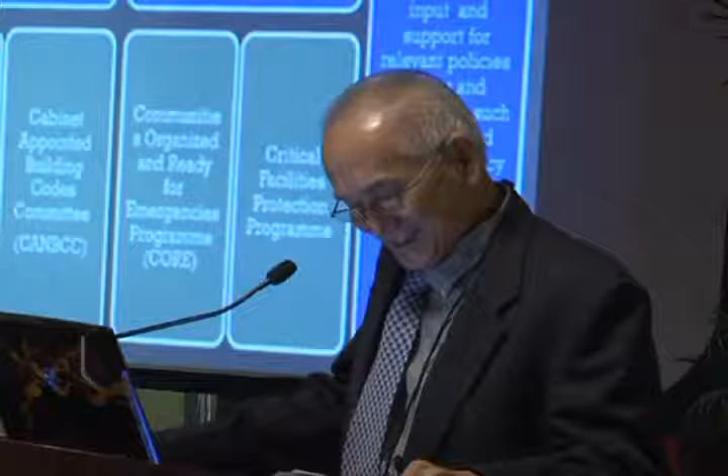For those of you who are familiar, I understand there's a very good agricultural faculty. In fact, my brother-in-law's son went to the University of Florida to do a degree in agriculture, and he's now assisting his dad in, some of you would know, La Vega Estate. Anyway, that's a plug for him.

Chris is a registered professional engineer in the state of Florida and the author of a paper on large wind missile impact performance of public and commercial building assemblies. Chris has worked on segmental and post-tensioning projects in the United States, Israel, and currently here in Trinidad and Tobago. His experience also includes the design and detailing activities relating to pre-stressed concrete, steel box girder and plate girders, and temporary works such as sheet piling, strongbacks, incremental launching, and false work systems.

He has worked on more than a dozen segmental projects, including the Frederick Douglass Bridge, Bonner Bridge, and Kanawha River Bridge, the longest span concrete box girder bridge in the United States. So Chris brings to us a wealth of experience in the field of bridge engineering, and he will now present to you his paper, Seismic Modeling of Multi-Span Semi-Integral Bridge. I invite Chris to the podium.

Thank you. I'd like to start by thanking APETT for inviting me. It's been very interesting and beneficial to be able to come down here and see some of the perspectives of other disciplines and the Caribbean in general, as you know, things are slightly different than they are in the U.S. But more importantly, it's been a really long time since I've had doubles, and so I've had the opportunity to get some of those on this trip.

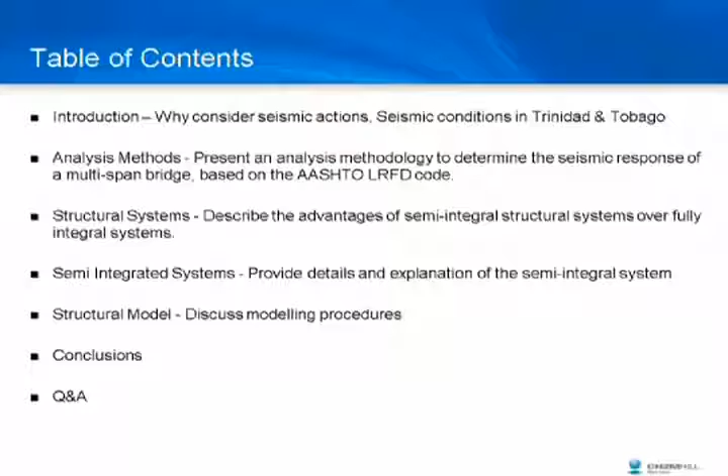So today I'd like to do an introduction on why we need to consider seismic action and what it can do to structures, and also go over some analysis methods, structural systems, and focus in on semi-integral systems and what their advantages are. And I'd like to finish up with some of the structural modeling to determine the seismic loads on a bridge.

Structural design in an active seismic zone can require careful consideration of a lot of parameters. A design engineer needs to consider things like seismic return period, which is a measure of an earthquake's severity—longer return periods equate to larger earthquakes. What the accelerations on the structure will be, how these structural materials respond—concrete obviously works a little bit different than steel—and how the different structural members behave. An I-section will behave differently than a 1.2 meter drilled shaft concrete section, and how the structure interacts with the soil surrounding it.

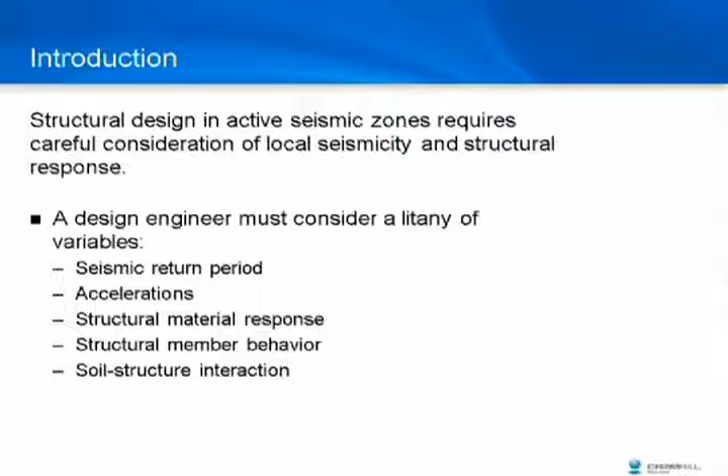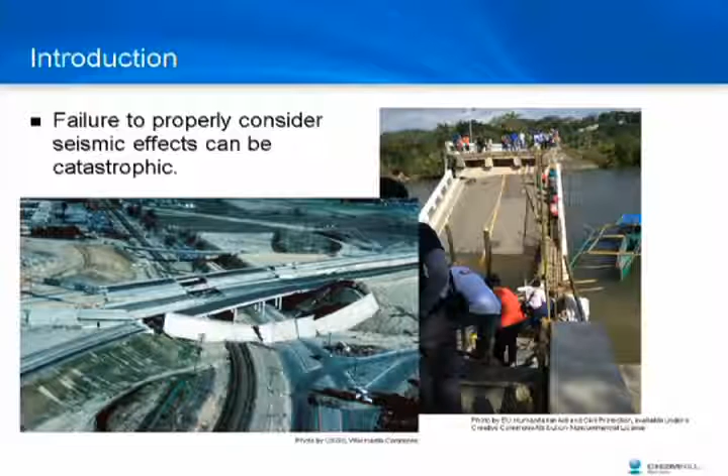Failure to properly consider these effects can be disastrous. They can cut off links between rural communities, also large interstates in the United States. There could be significant loss of life in a structural failure. This was seen in some of the earthquakes a few years ago in Northridge and the Loma Prieta earthquake.

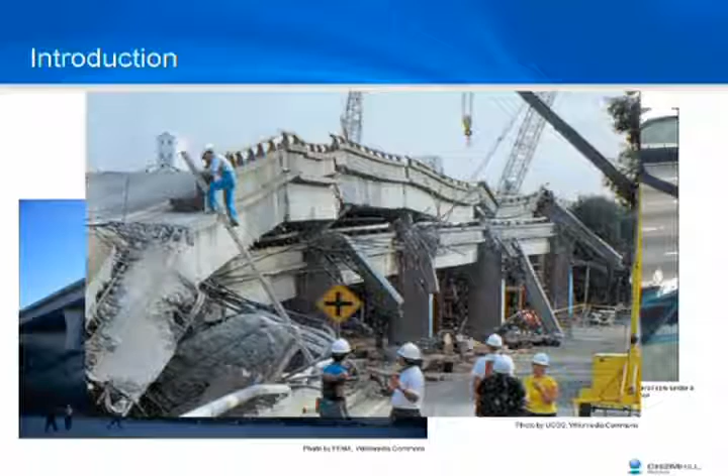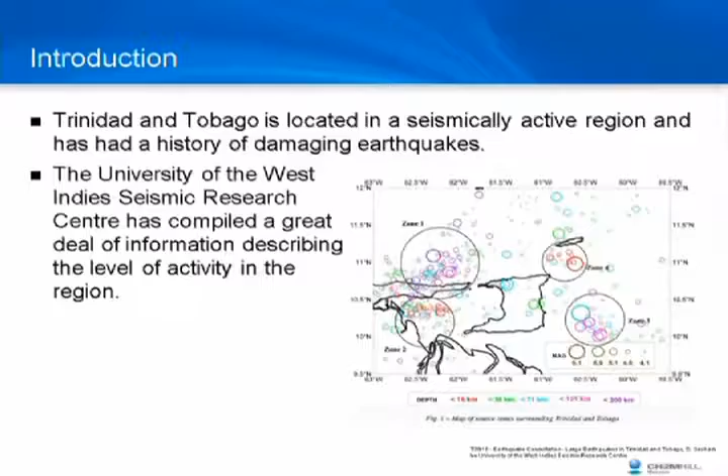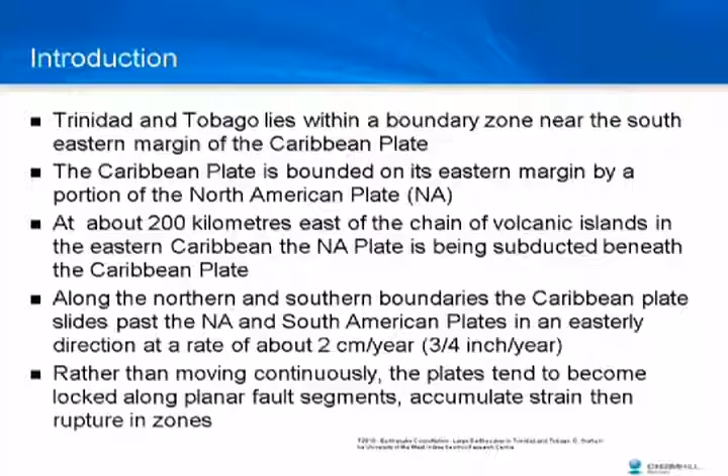Trinidad is located in a boundary zone between the Caribbean and South American plates. They move by approximately 2 centimeters a year relative to one another, and for us Americans in the room, that's about 3/4 of an inch. And rather than moving continuously as a smooth surface against smooth surface, they tend to lock, and then the restrained force is released all at once, causing an earthquake.

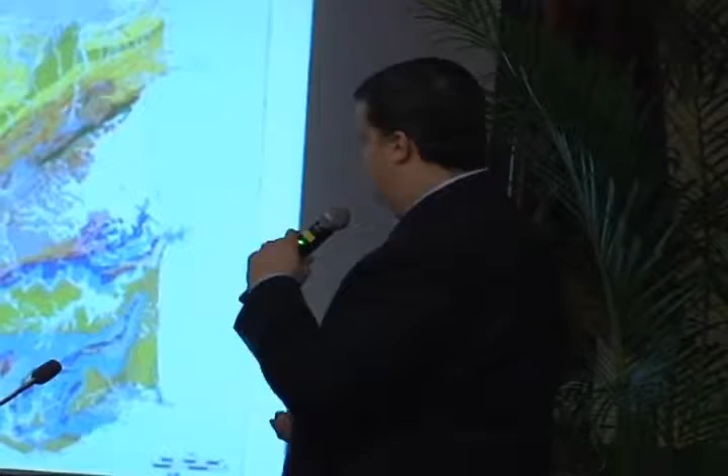Here you can see this is a soils map of Trinidad, and down here in the south of the island, there's a very clear delineation along one of the fault lines, where the soils to the west match up nicely with the soils to the east, showing some of the relative movement between the two plates. For reference, this is the Sir Solomon Hochoy Highway extension project currently under construction.

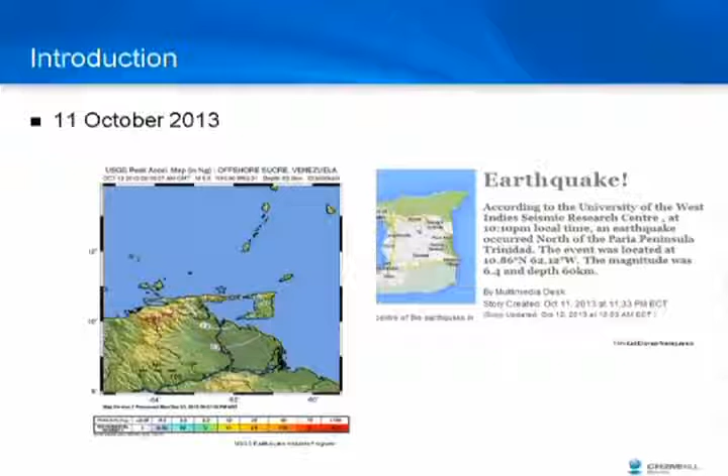Some of you may remember last year there was an earthquake to the north of Venezuela that was reportedly felt on the island. That's not too far from Trinidad. Had it been closer, you may have suffered more damage than was actually experienced. So now I'd like to talk about some analysis methods.

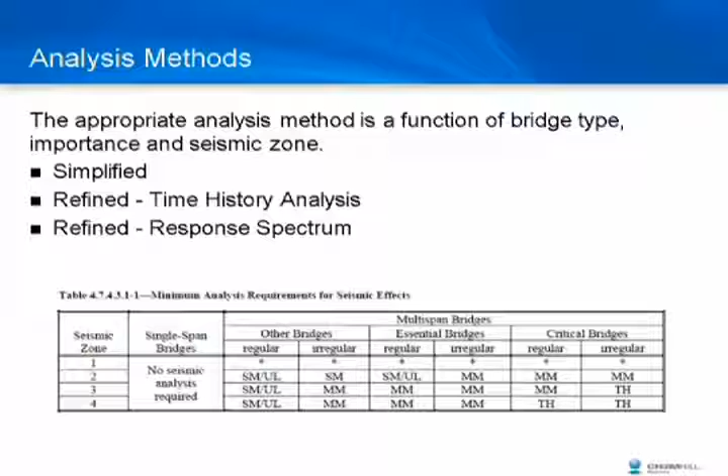The American Association of State Highway Transportation Officials has the design specifications used in the United States. They have various analysis methods that can be used, and they prescribe which can be used when, based on the importance of a bridge, a parameter defined by the owner; the regularity of the bridge, a measure of the relative span lengths, skew, curvature, and so on; and the seismic zone, which measures the risk of a seismic event for a particular structure. Generally down in Trinidad, we're in seismic zones 3 and 4.

These are the various analysis parameters that you're allowed to use. So for a relatively simple bridge in a seismic zone 2, you can use a single mode or uniform load method. As you get into critical bridges in higher seismic zones, it requires a more thorough time history analysis.

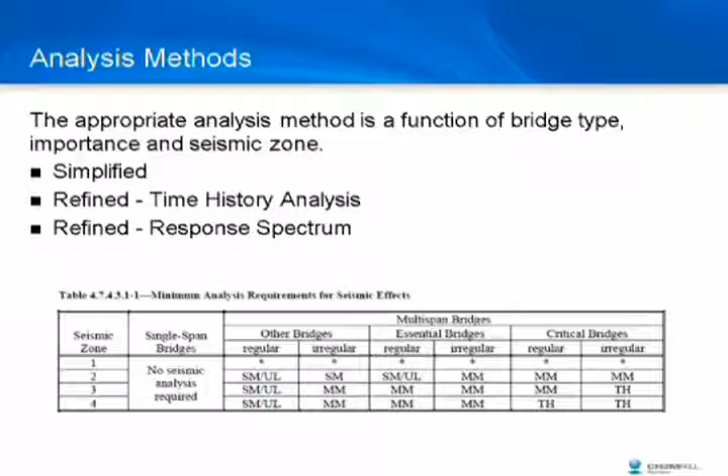There are simplified methods for a single span bridge. All you need to design is the connection force between the superstructure and the substructure. This can essentially be a force equals mass times acceleration calculation. For semi-integral bridges, which is what I'll be talking about today, this can be used to size the back wall, which is what will actually be taking the seismic force.

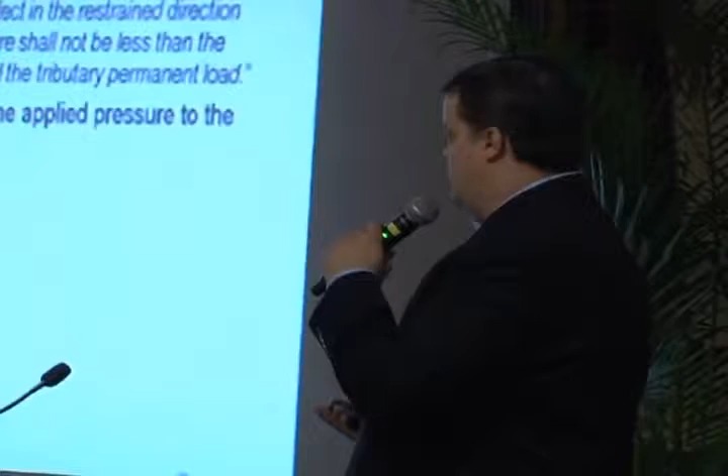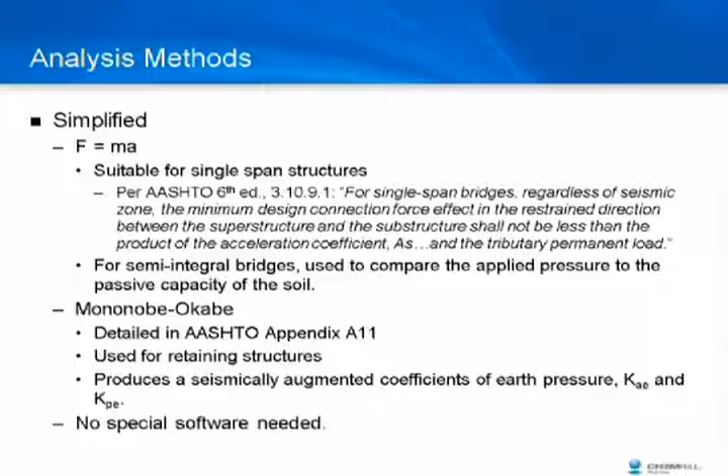Another related method is the Mononobe-Okabe method. This is a seismically altered coefficient of active earth pressure generally used for retaining structures, but it's a static analysis used to approximate a dynamic effect. There's no special software needed for these analyses.

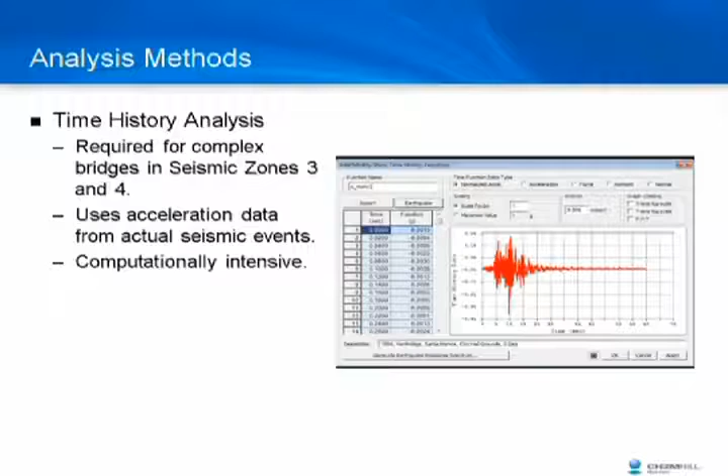The most onerous is the time history analysis. It's required for the most complex, largest, most expensive bridges. It uses seismic acceleration data from actual earthquake events in the United States, generally the Loma Prieta earthquake or the Northridge earthquake in California. These are computationally very expensive. Even the most state-of-the-art, high-powered machines can take hours or days to run through an analysis, depending on the bridge complexity.

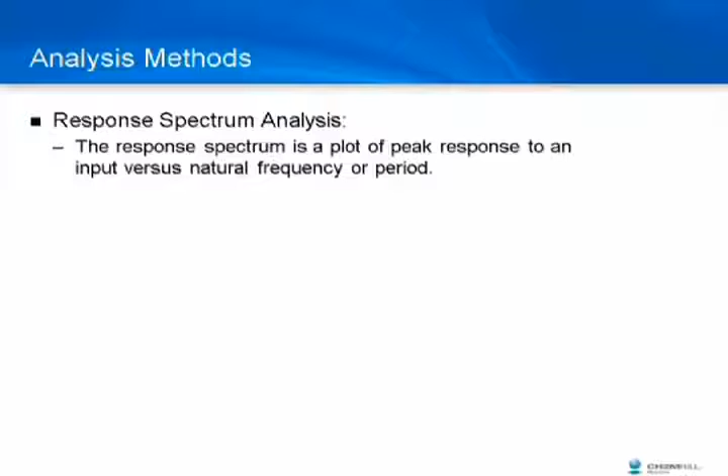In general, a response spectrum analysis is used. This is a plot of peak response versus frequency or period, and it allows a design engineer to consider multiple events and frequencies within a single analysis. It can be used for a single mode or multi-mode response, and for structures requiring a multimodal analysis, AASHTO requires that a three-dimensional model be constructed, with the number of modes considered being at least 3 times the number of spans.

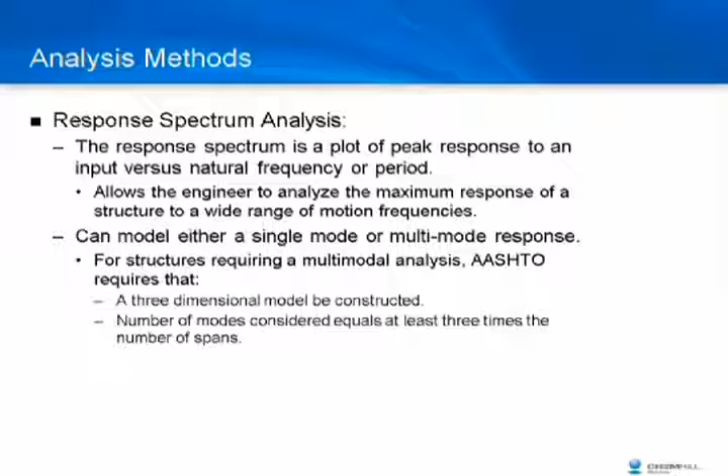So for the 3-span bridge that I will go through in a bit, that's 9 modes of behavior.

I've mentioned structural modes a few times. That relates to the structural behavior at various natural frequencies. So in this animation, for the first mode, at a natural frequency of about 1.7 hertz, it moves in one way. For mode 2, it is a completely different motion. And for modes 3 and 4, they are again different motions. So the same structure, based on different vibration frequencies, can behave differently.

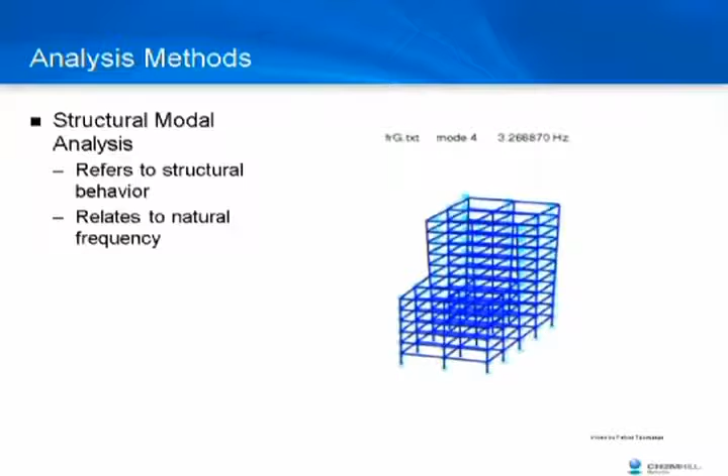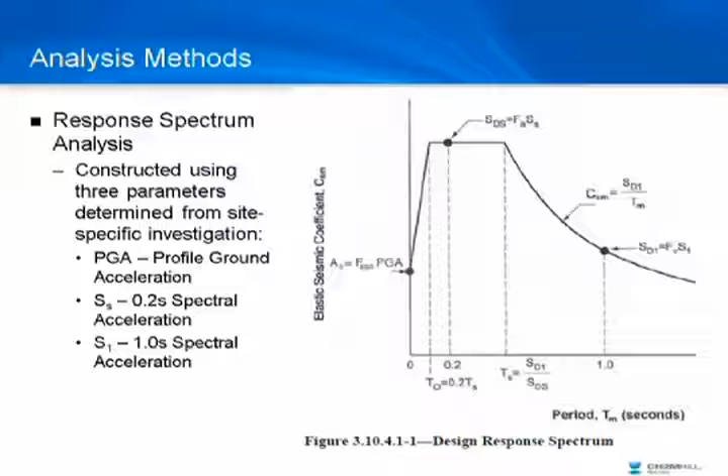The response spectrum is constructed using 3 seismic parameters: the peak ground acceleration and the 0.2 and 1 second spectral accelerations. This is the curve that is used to relate the acceleration with the period.

There are a couple of different structural systems that can be used in a seismic zone for a short to medium span bridge: the first being an integral structure, and the second being semi-integral. An integral superstructure is connected to the substructure. Here we have a diaphragm at the end of the beams, tied into the abutment cap with reinforcing, creating a rigid connection between the girders and the abutment wall.

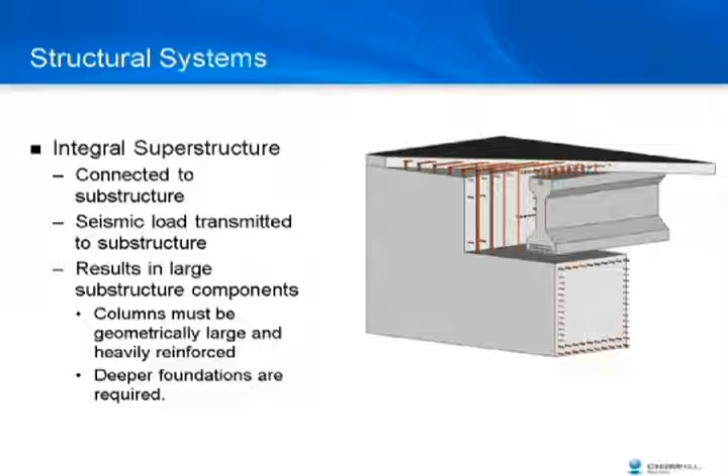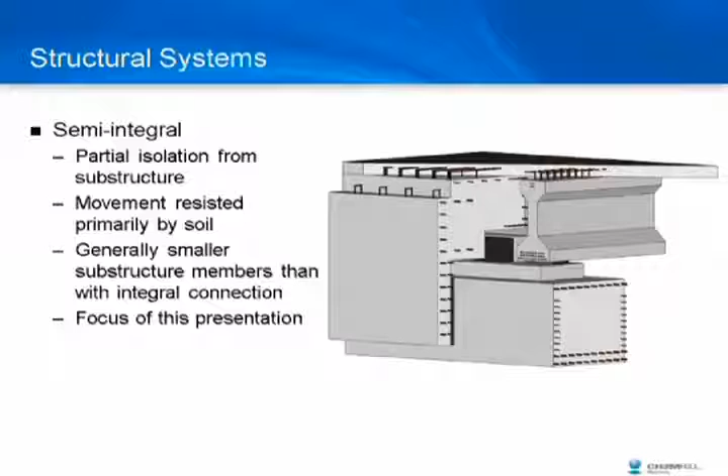Because all of the load is transferred into the substructure, the components are generally larger and therefore more expensive than the semi-integral counterpart. For the semi-integral, the superstructure sits on bearing pads and is partially isolated from the substructure system. This allows the superstructure to move freely, or restrained only in the ways that we want, and prevents a lot of the seismic and thermal loads from being introduced into the substructure. This, of course, means less load, which equates to smaller components, relating to cost savings.

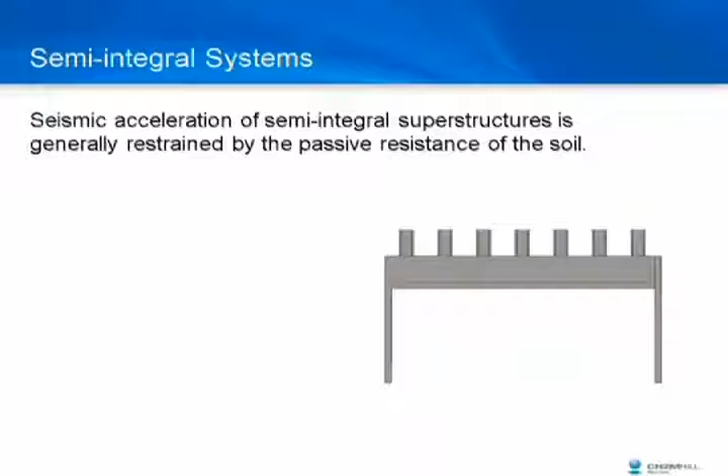So where does the load go if we are not connected to the substructure? The semi-integral system is generally restrained by the passive resistance of the soil. As the longitudinal motion of the superstructure gets pushed into the soil, you gain a resistance from that soil. Likewise, as the bridge moves to the side, you gain a resistance on the fin walls that are hanging from the diaphragm.

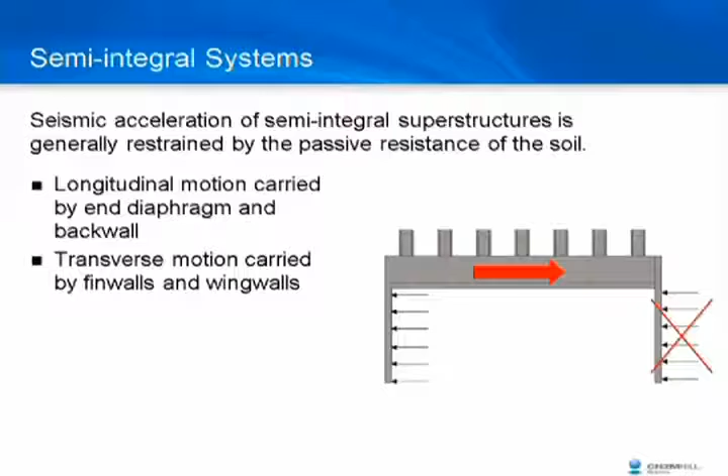In general, bridges have retaining walls or slopes on either side for grade separations, so in general, the leading edge is not considered, as the soil cannot often be considered as fully active.

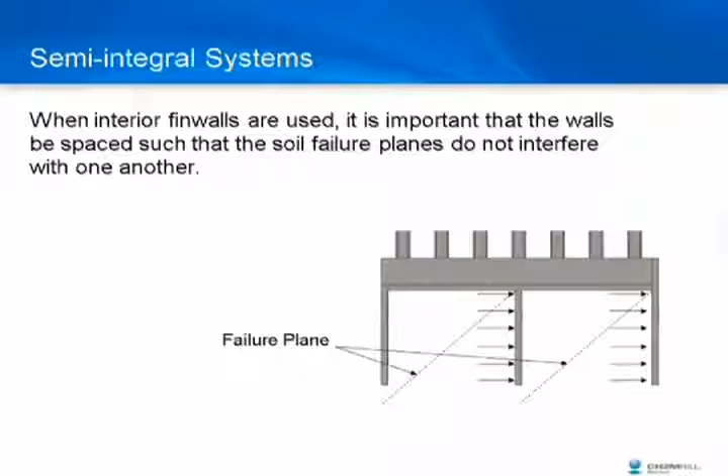You can use several fin walls, but the danger in using that is you need to make sure that the failure plane of the soil does not intersect with the adjacent walls. This can cause a reduction in the capacity of the soil, and therefore you're not going to get the resistance that you're expecting.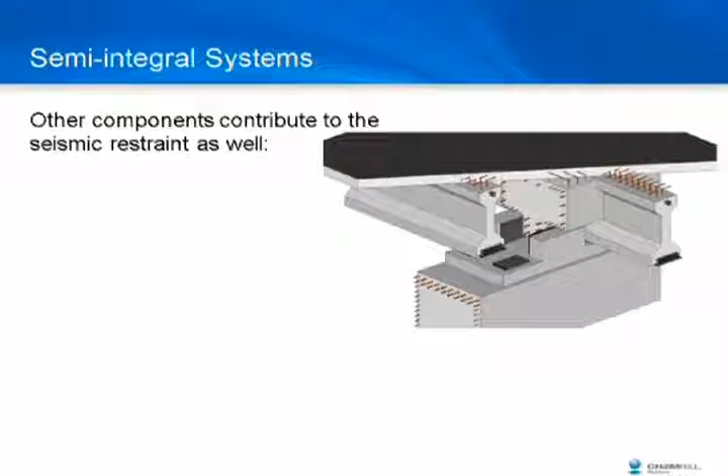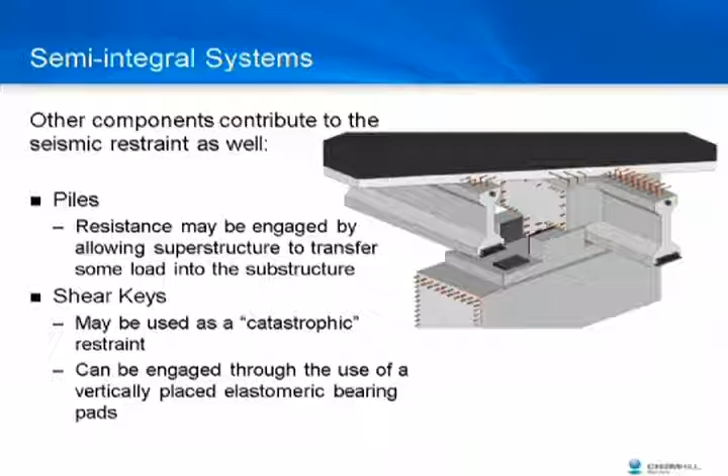If we want to, we can use other components to help carry the seismic motion. At the piers on this multi-span bridge, we have shear keys with bearing pads interlocking with the superstructure diaphragm. This helps engage the pile and produce an additional resistance beyond what is available from the passive resistance at the ends.

Here I'd like to walk through an animation of how all these pieces fit together. So here we have a 3-span pre-stressed girder bridge over a river.

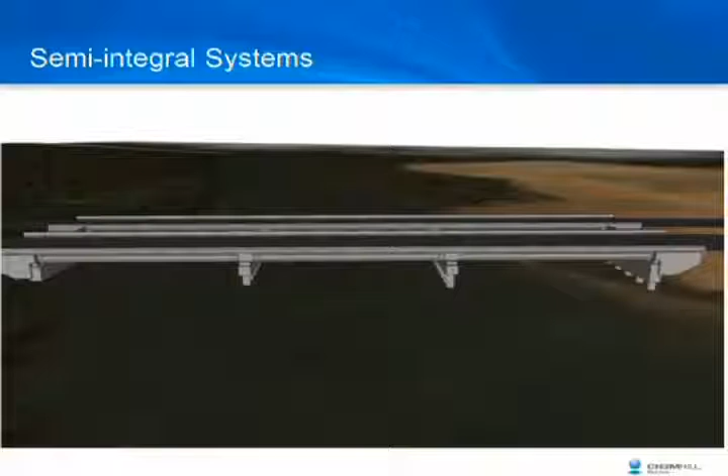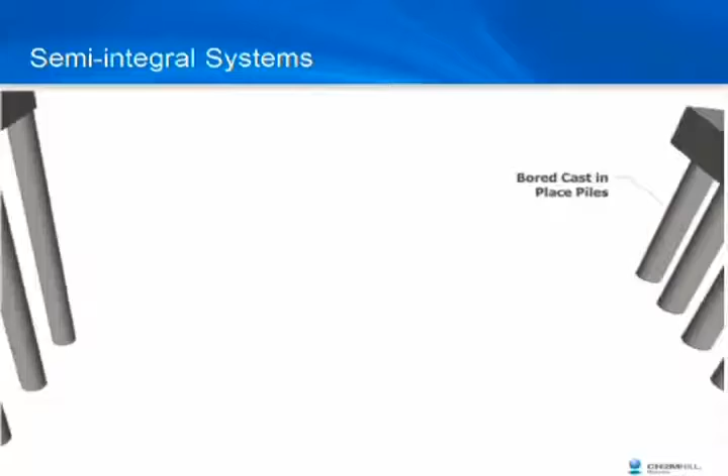As we dial in, it's sitting on bored cast-in-place piles at both the abutment and at the piers. Here is the semi-integral system I just went through.

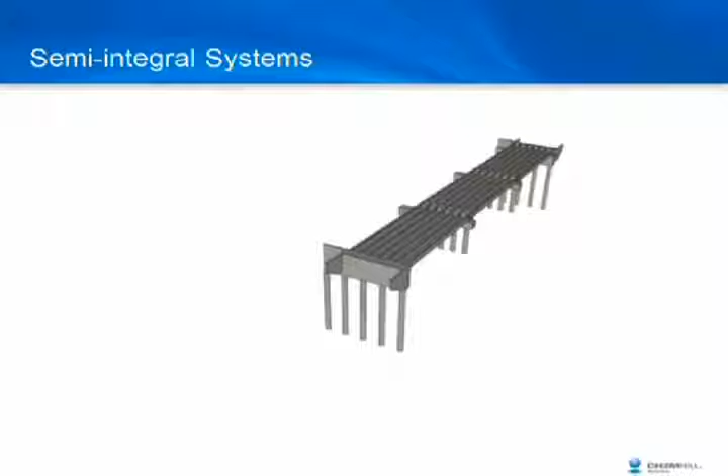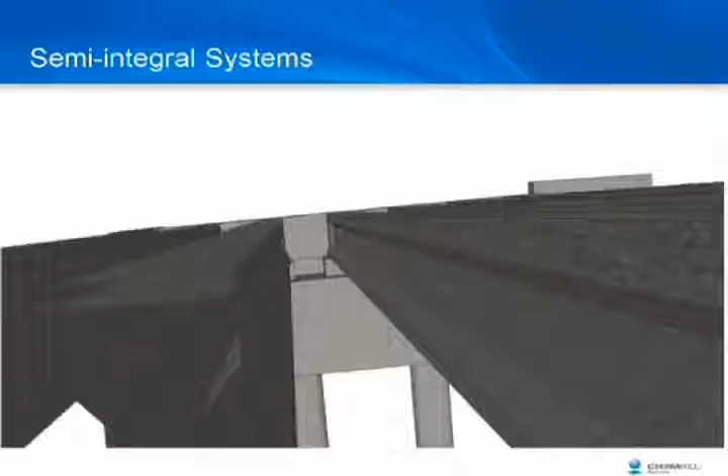We have the diaphragm in between the girders. The girders are cast in, and there is reinforcing running through the girders. We have a shear key to interlock with the diaphragm, a wing wall and fin wall to, again, take the lateral motion of the bridge.

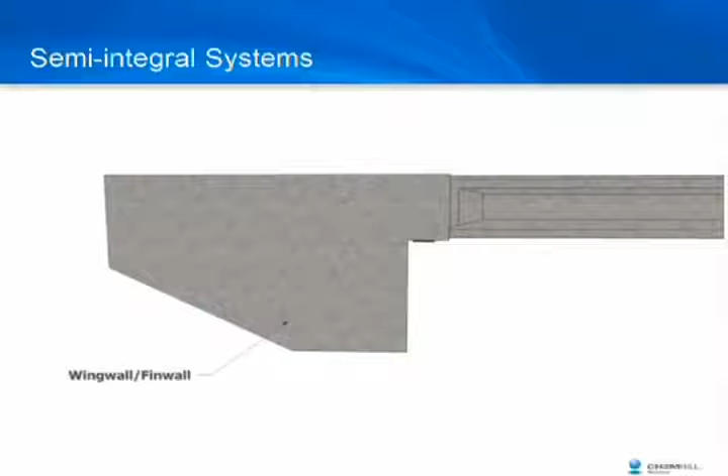And here's how that fits in with a suspended back wall and diaphragm, and this whole system takes the passive resistance of the soil.

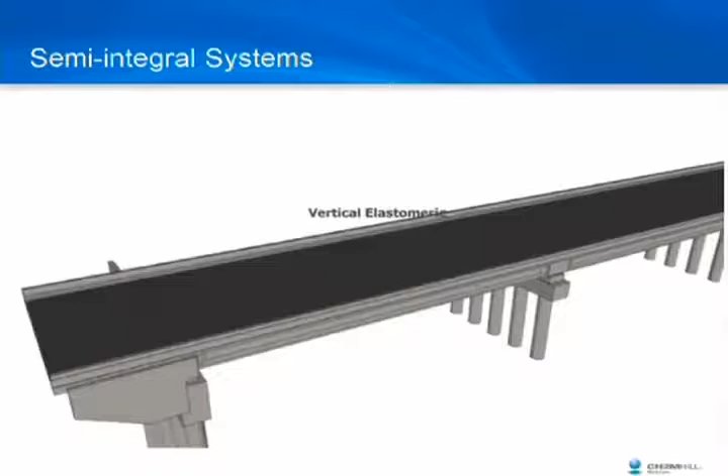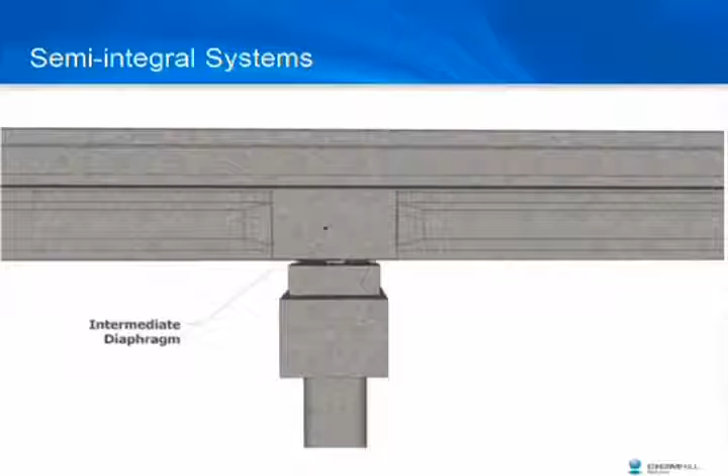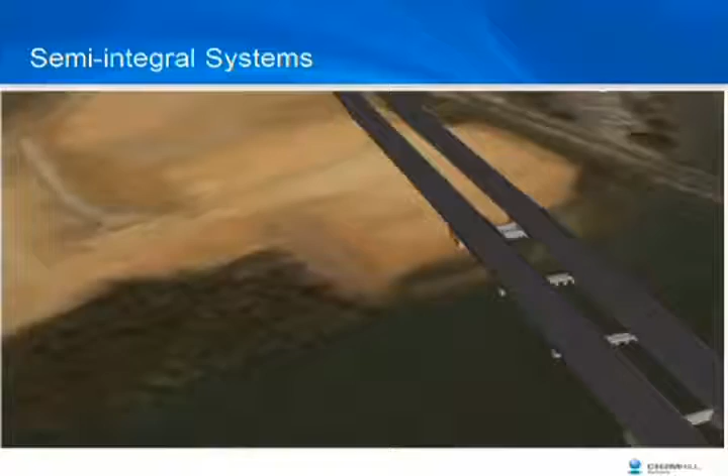As we move into the pier, we have the vertical shear keys with vertical elastomeric bearings to tie in with the diaphragm. Each girder from the adjacent spans is tied together in one heavy diaphragm, and here you can see the keying in. So as this moves, it'll engage that spring in the bearing and engage the piles.

So all of this needs to be modeled somehow. Again, AASHTO requires a 3-dimensional analysis. This is utilizing a finite element software called MIDAS, and it's very important to model the actual geometric and material properties of the structure.

Seismic analysis is very dependent on relative stiffnesses and performance of the materials. So it's critical so that the stiffness of the bridge and the motion of the bridge is captured, but it's also important so that the mass is correctly distributed throughout the structure.

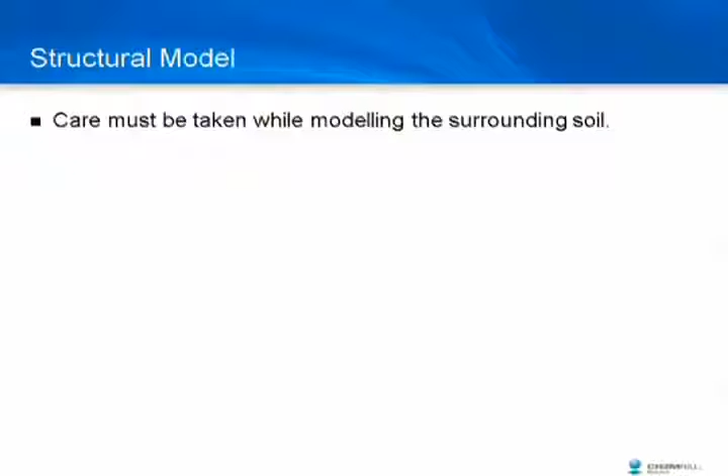The soil structure interaction is very important, as we're relying on that to carry the load. Soil behaves non-linearly, and therefore either nonlinear springs need to be defined or an iterative solution needs to be used.

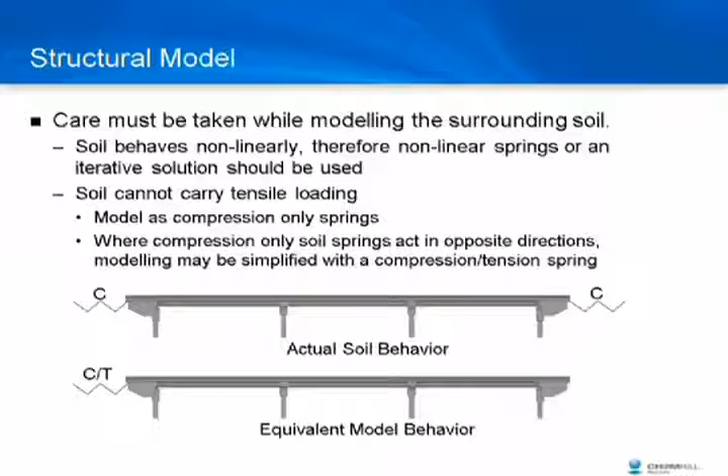In reality, soil is not very good at taking tensile load. So in your actual structure, this is an idealization of what's happening. For modeling efficiency, you can also use a compression/tension spring to model the opposing compressive spring.

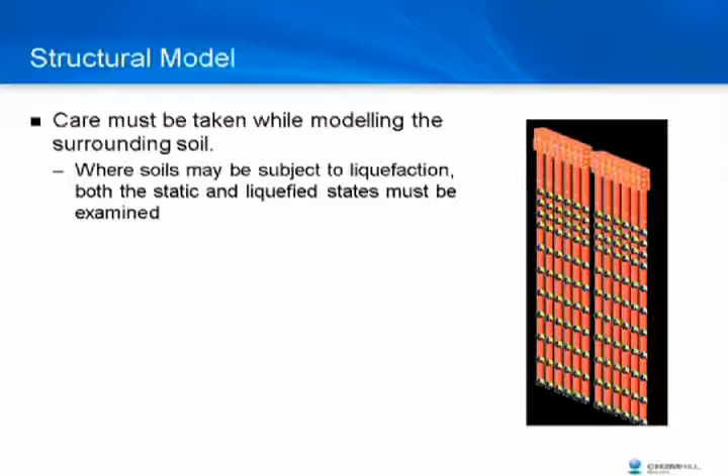Where soils may be subject to liquefaction, it's important to examine both the static and the liquefied states of the soil.

Seismic can be counterintuitive in the sense that the liquefied soil will produce a taller column, but in seismic design, stiffness is the enemy. It's going to draw more load, so as the pile gets longer, it becomes more flexible and allows a freer movement of the structure.

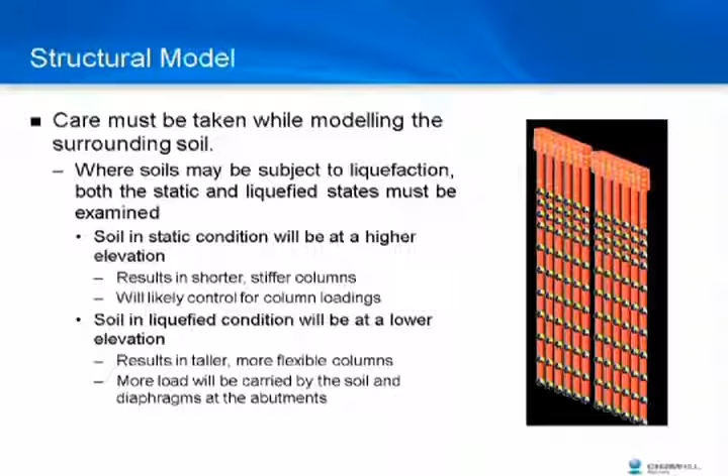So both conditions need to be made because one condition may control for one component, another condition may control for another component.

The bearings that we looked at before can be modeled as springs. Finite element software likes to put a single member with the section properties of the component you're looking at. It's important to provide rigid offsets so that the actual depth can be modeled.

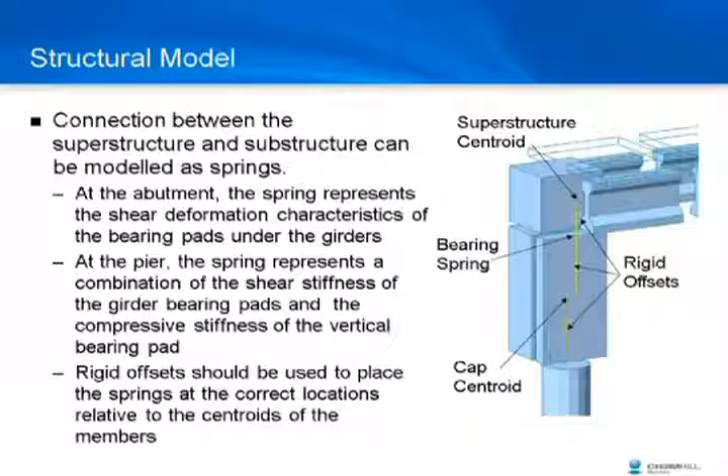A horizontal motion at a distance is going to cause an additional torsional moment in the cap, and so it's important to model that with rigid offsets so the geometry actually fits together the way it's supposed to.

Here is a definition of the response spectrum. It's important to make sure that dead loads are modeled as masses. In this particular software, just because I add a dead load of a barrier in doesn't necessarily mean that that's going to be included as a mass in the structural analysis.

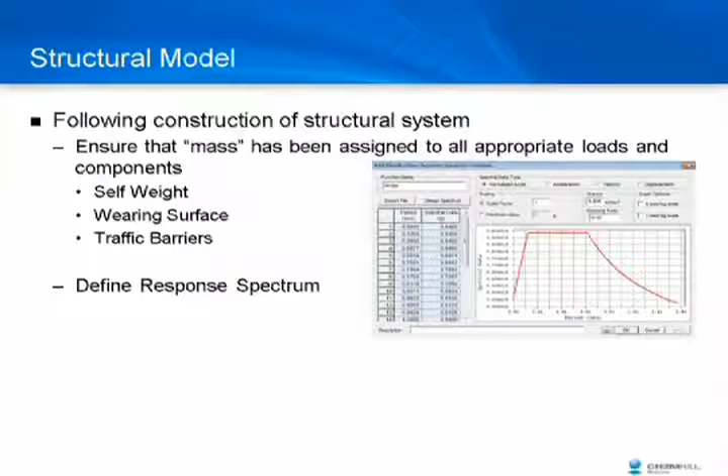So once those are defined and the response spectrum is defined, you run the analysis. AASHTO requires that you look at both the longitudinal and the transverse motion of the bridge, and that those be combined using 100% of the longitudinal response with 30% of the lateral, and vice versa. So you have a resultant effect in a diagonal direction.

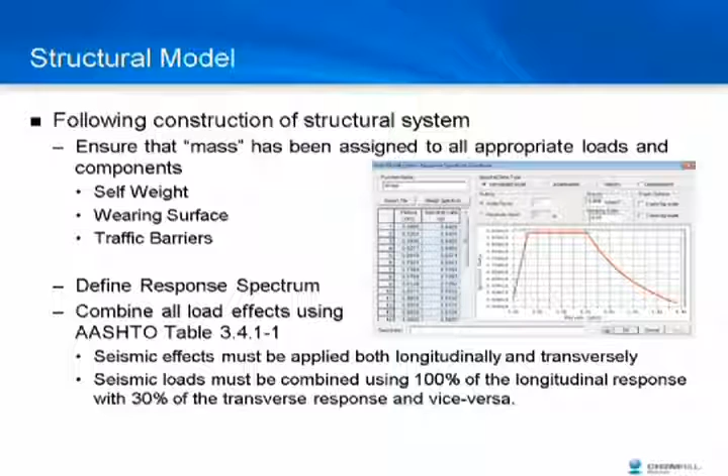So in the end, design of a multi-span bridge in a seismically active region, such as Trinidad and Tobago, requires a refined analysis. And use of a semi-integral superstructure greatly reduces component sizes and therefore the cost, which generally makes the owner happy.

It lends itself to more flexible elements, and the seismic loading is primarily resisted by the passive resistance of the soil at either end of the bridge.

Use of a 3D model to determine the structure's seismic response is required by AASHTO, and a response spectrum analysis is the most common way to perform that analysis.

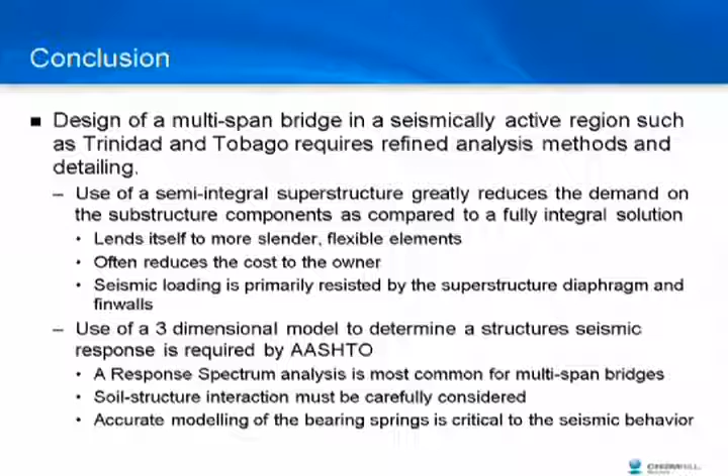It's important to model the soil structure interaction accurately, otherwise the structure will behave differently than you're intending, and accurate modeling of the bearing springs is also required.